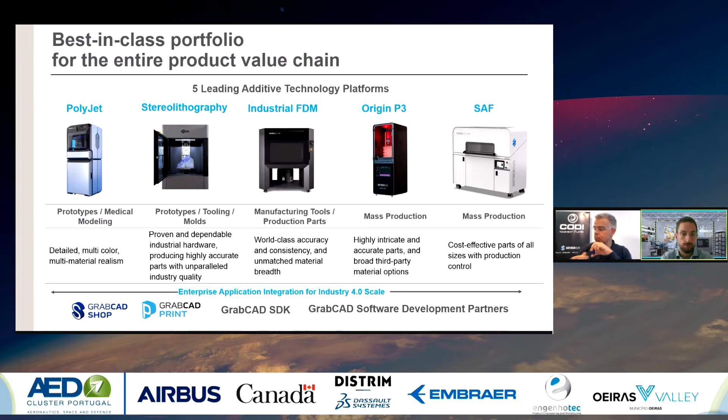What is important, and this is the biggest news of the last years, is software. Through software, we have been able to integrate all our printers in a unique interface, giving the customer the possibility to process their files and have the machine file ready in minutes, easily, and also integrate with the current setup of the manufacturing floor. So it's very important to provide both the hardware and the software, and this is what Stratasys is doing today.

Very quickly on the FDM technology, this is our first technology. It's filament based, and it uses thermoplastic material. We see here on the left a video of how it works briefly, and we see that it's based on the use of model and support material. This is important for what we will see later.

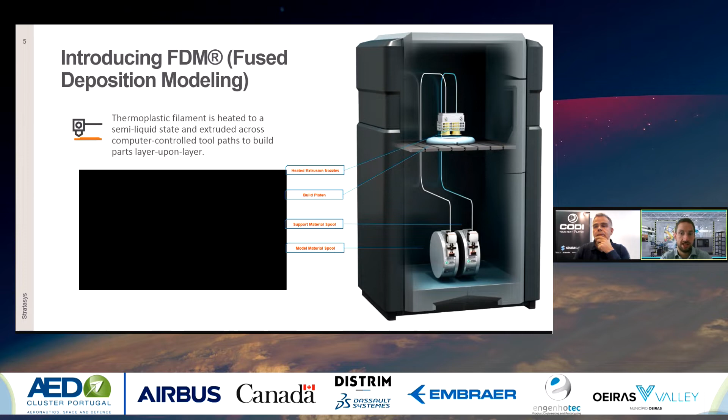Also on the right side, we see a little bit internally into the printer how the material comes. It's in the form of canisters, and this is very important for this technology because it means flexibility and easiness to change between one material and the other. And we will see that it makes possible to access multiple applications through these properties.

The range of printers for FDM today is quite broad. Starting from the left, we have the office printers. We call them in this mode, the F123 series. Given the materials that this printer can use, they are suitable and used for prototypes and tooling. Still for prototype and tooling, we have the F770, which is the biggest or the largest filament-based machine from Stratasys today. This is a 1 meter wide machine, and it was launched last year.

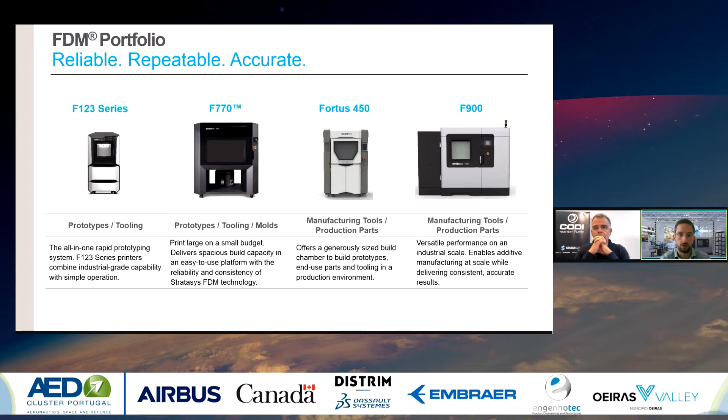It runs ASA and ABS, so it's sold specifically for prototyping and tooling. On the right, we see the two machines that enable production, once again thanks to material - the Fortus 450 and the F900. They are the machines used today by our military customers, by our aerospace customers, automotive, rail, bus, and really advanced industries. We will see now why they are used for this purpose.

Just a couple of words on why an investment on FDM is a good one. First of all, the materials. FDM, by using real thermoplastics, is capable of delivering materials with superior properties. It can be the mechanical properties, the impact resistance, the thermal, the chemical.

Really, every material has its own field of application and enables the customer to fulfill all the requirements. We have seen in the small video and in the small structured design how it works inside. This is an extremely easy to use technology. You don't have powder going around, you don't have resins. It's very quick and easy to change between one material and the other. So really, this is easy to use and unattended technology.

What our customers appreciate a lot is the return on investment. When investing in this machine for the right application, the return on investment is typically between 9 and 18 months. So it's a machine that pays for itself in a very short time.

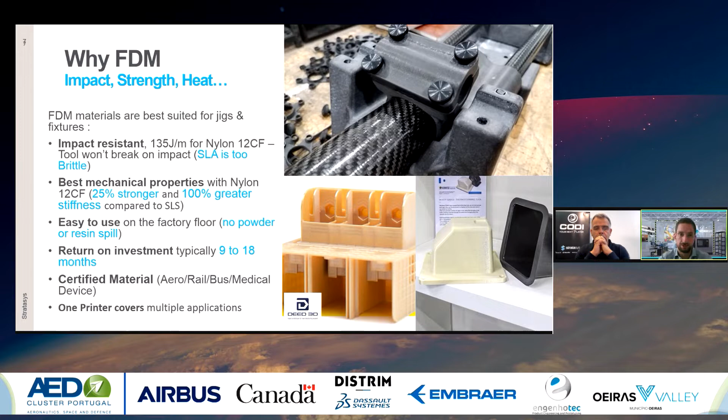Materials, once again, material is the word that I will say the most today. We have certified materials running on these machines. Our materials meet the certification requirements from aerospace, rail, bus, medical, military, biocompatibility—really a lot of different certifications. And here we finally see how we meet all these requirements.

So I divided the materials according to their performance. Going up, we increase the mechanical, thermal, and chemical performance. We start with the standard plastics. We go up with the engineering plastics, where we find the polycarbonate, the nylon, and all the different blends of nylon that we make available to our customer.

And we go up to the high performance materials. Here we find the Ultem family, where we have, for example, the FST rated materials, the materials that are certified for aerospace, for space, for military. We have the nylon 12CF, which is a nylon with 35% carbon fiber, so a very strong material from a mechanical standpoint. We have Antero, which is a PEEK material, so high chemical and high temperature resistance.

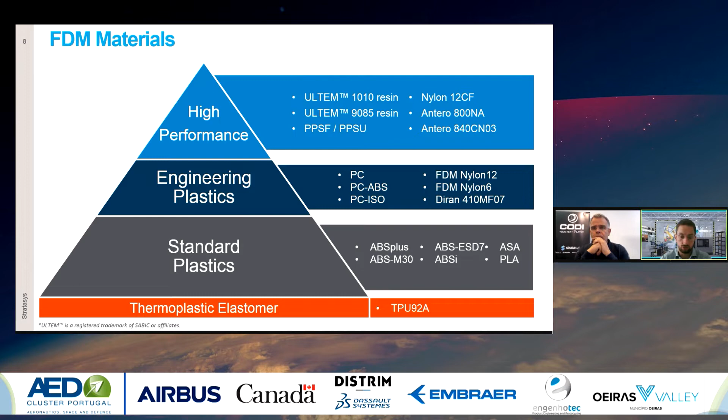At the bottom, you also see that we introduced elastomers. So on the office printer, the F123 family, we have the possibility to print also a TPU. And so we can access all these print applications where we need a flexible material.

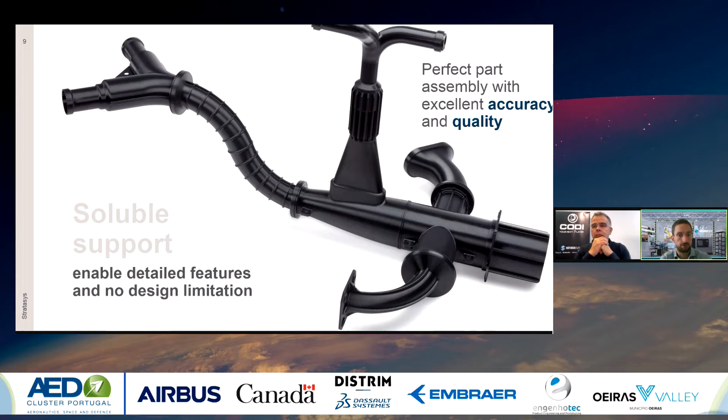I said in the beginning, this technology is based on the support and the model material. We have the possibility to use soluble support. Very briefly, it enables creating even more complicated geometries, because we don't need to manually access the internal part of the component—we can dissolve the support just by putting it in a solution of water and caustic soda. So again, more freedom and more flexibility with FDM.

Last, on material: Stratasys has changed its paradigm on material. We were closed before, and now we've changed to an open paradigm. That means that on the Fortus 450, people will be able to access third-party material, will be able to develop their own material, and tune the parameters of the printer to achieve the best performance of their material.

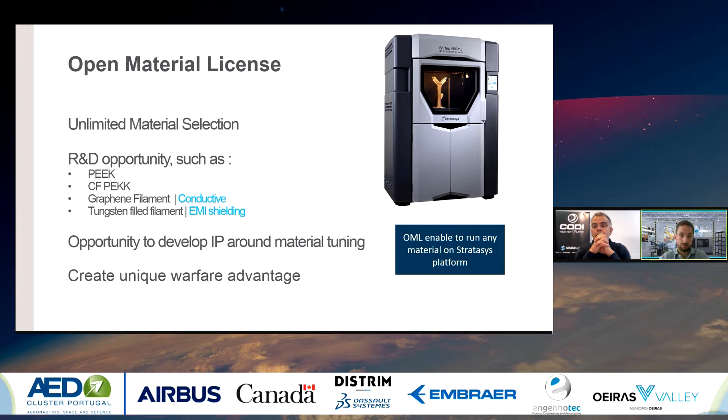This is especially important in the military field, because we know there can be niche materials that aren't developed because they're not for the large market. But with this capability, military customers can develop their own material with their own properties. So this is very important from Stratasys.

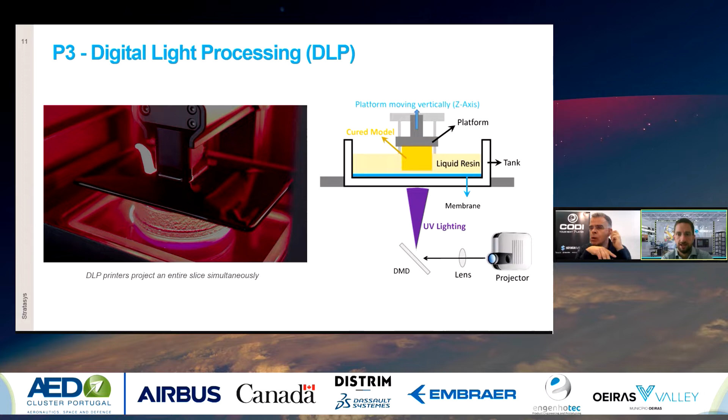Second technology, and this is a kind of new one for Stratasys—it's a digital light processing based technology. We call it P3. And like any DLP technology, it's based on the use of resins and their polymerization, in this case thanks to UV light that is irradiated by a screen onto the shape that we want to create.

Just a couple of highlights on this machine: this is the machine with the lowest part cost on the market based on DLP. It has a build envelope of 192 on the X, 108 on the Y, and 370 millimeters on the Z. On quality, this machine is capable of delivering the best quality within the resin technologies, with a tolerance of plus or minus 50 microns. This is really a game changer in this world of machines, and it has surface quality comparable to injection molding quality parts.

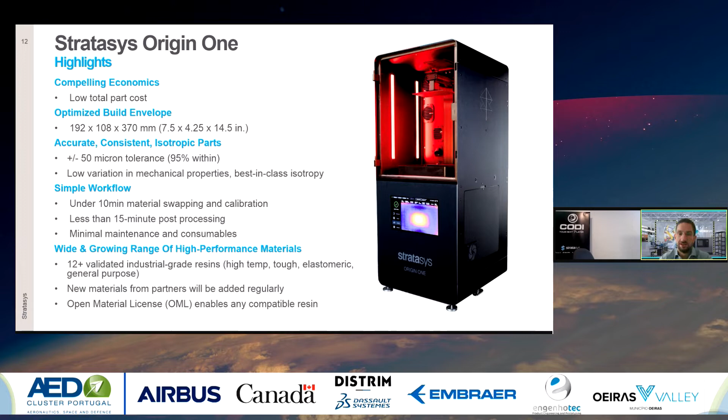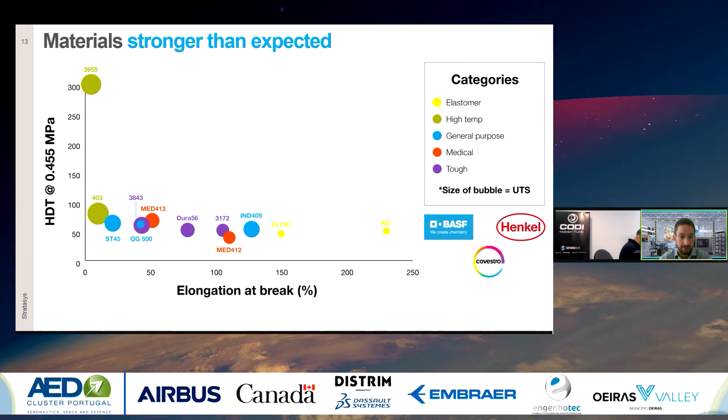What I want to highlight on the left top, we see the 3955. This is a high temperature material, can go around 300 centigrade degrees, and it's FST rated material, so it meets the requirements from the aerospace industry. This is very important because it enables a lot of applications with this new technology.

The third one we will see today in the application is the SAF, our new powder bed based machine. In this case, we work on powder. We have fluid and lamps as a source of energy, and it basically melts the powder to create the part that we want to create.

Just a couple of highlights on this machine. The layer height is 100 microns. We have a size of 315 in X, 208 in Y, and 293 in Z direction. Currently it works with PA11 material, but we announced just last week that we are going to run on this machine also PA12 and polypropylene.

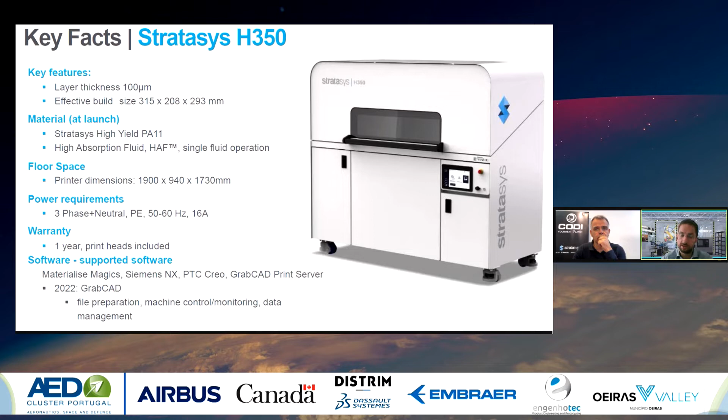So this is also a machine very reliable and that can deliver very low cost per part components. From a material standpoint, it's less wide than the other technologies, but we will see that it's still capable of delivering very important applications for the military industry.

Let's talk now about the application. This is the most important part of the presentation. I introduced a little bit the company, the machines, the materials. Now let's see what we can do for military and for aerospace and defense in general.

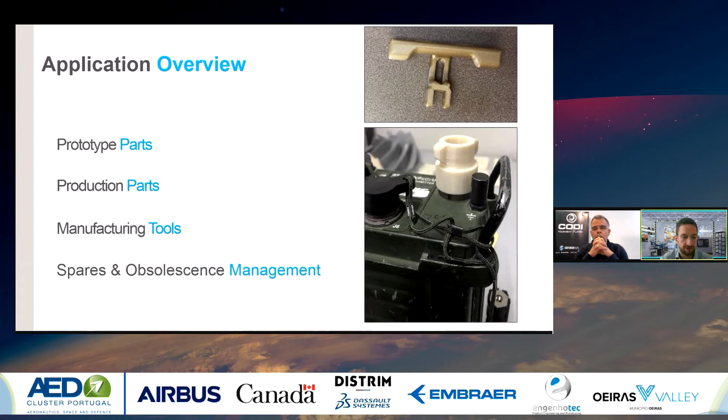Our technology enables, of course, prototyping - that's the history of additive manufacturing. But today we can place ourselves in production parts, manufacturing tools, and also in the management of spare parts and obsolescence. That means we are able to create tools for metal forming, thermoforming, polyurethane, foams, and composite layup tools. Really, our materials and printers enable a wide range of applications.

The first one I would like to show today is metal replacement. We introduced it a couple - well, we had the pandemic in between, so the timeline is a bit stretched - it was 4 years ago actually. We introduced 4 years ago the nylon 12 with carbon fiber.

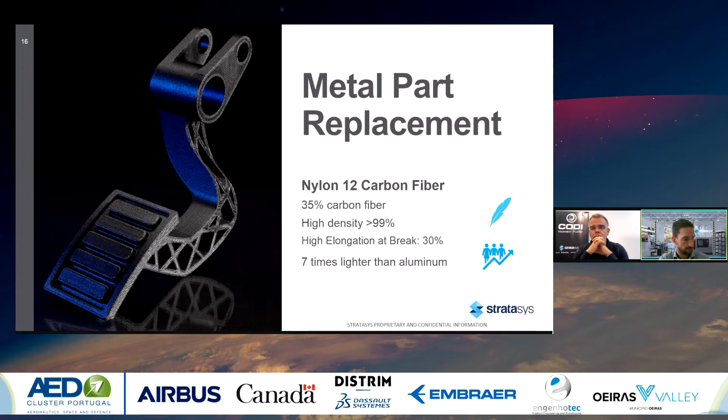We were able to achieve a 61% weight saving, and by that, reduce the cycle time by around 20%. Otherwise, you can keep the same cycle time but use a smaller robot with lower power, meaning a lower investment when you need to buy your robot for your facility. Also on cost saving, besides the time, the cycle time or energy on the robot, you also have direct cost saving on the replacement of the part.

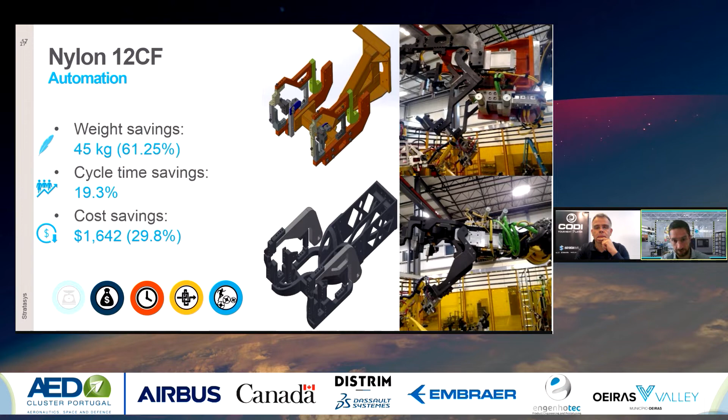The part on the bottom was around 30% cheaper than the previous one made with welded steel. It was also faster, so you achieve all the objectives of additive manufacturing: faster, lighter, and cheaper.

Here, the time advantage is even bigger than the previous example, because we were able to have our parts in hours instead of days or weeks. A couple of properties of the material: it's capable of withstanding over 900 bars of compressive strength, and this leads us directly to the next example.

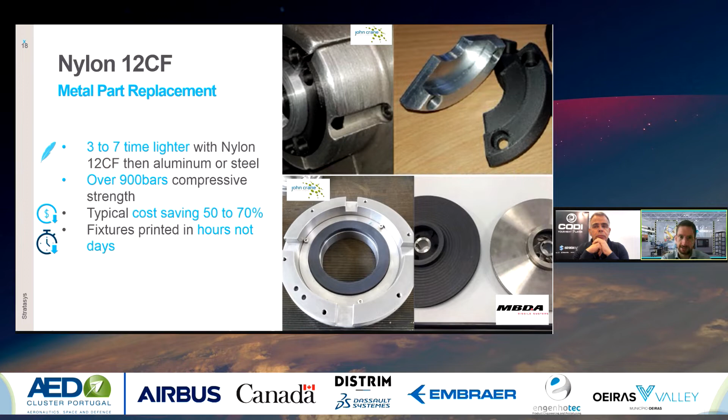Thanks to the compressive strength, we can use our plastic printed part to produce sheet metal. In this case, this is a sheet metal forming mold. Just a couple of words on this tool: the duration. This tool was able to last more than 500 cycles. So we don't have the same duration as a metal tool, but when we have the need to produce something like 500 parts with this metal shape, and this is typical in the military and aerospace sector, we can use our nylon 12 CF part to produce the mold and then do the sheet metal forming.

Thanks to the compressive strength, we can also do several materials, so aluminum, titanium, steel. Of course, depending on the pressure and the material, we need to go to lower thickness, because forming 2 millimeters of steel is different than forming 2 millimeters of aluminum. So again, here we need to be a good engineer and adapt to the requirements, but this is a very valid solution, extremely faster and lower cost in comparison with traditional technology.

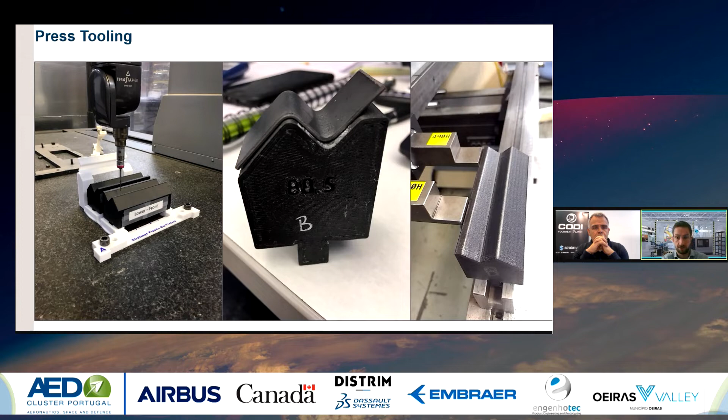Last example, we have a couple more for metal replacement, just to say that it's not only about nylon 12 CF, but we can also use all the other materials we have available on FDM. The example here is Ultem 9085, weight reduction from 68 kilograms to 12 kilograms. Now let's see what the advantage is in this case.

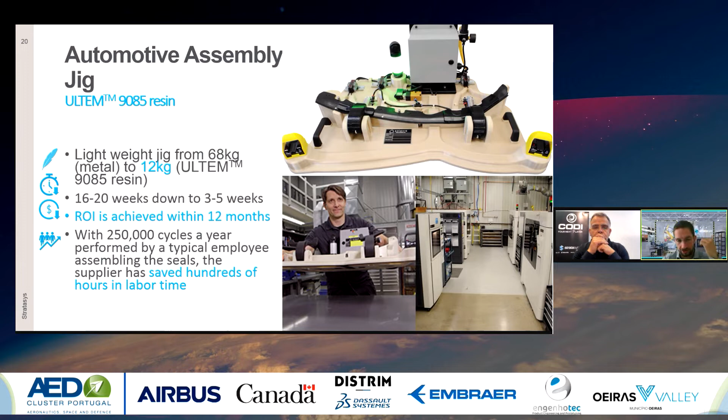On the lower left picture, we see the operator moving this assembly tool with his hands. So you don't need additional equipment to move it. Once again, this is a quicker and cheaper item to get in comparison with traditional technology.

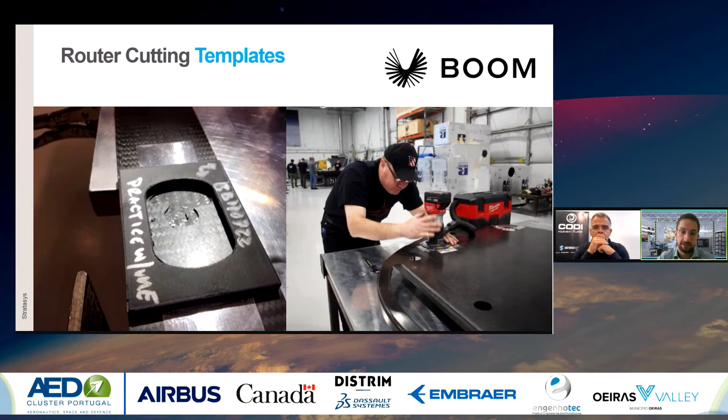Here we see an example from aerospace, Boom Supersonic. On the left, you see a router cutting template, realized with Diran. Diran is a nylon-based material with talc, and it has the lowest coefficient of friction of our materials. This means that if you use a tool made with Diran and by mistake bump into your part, this will not create any scratch. This is a very good property for a tool, and this is why Boom is using our Diran material and our printers to produce these kinds of templates in their manufacturing chain.

This is the last one from the metal replacement section. I just wanted to underline the capability of reaching high temperature for our materials. ULTEM 1010 can go up to 213 degrees. You can think about a lot of applications. Just one that I brought today is spraying for thermal procedure coating.

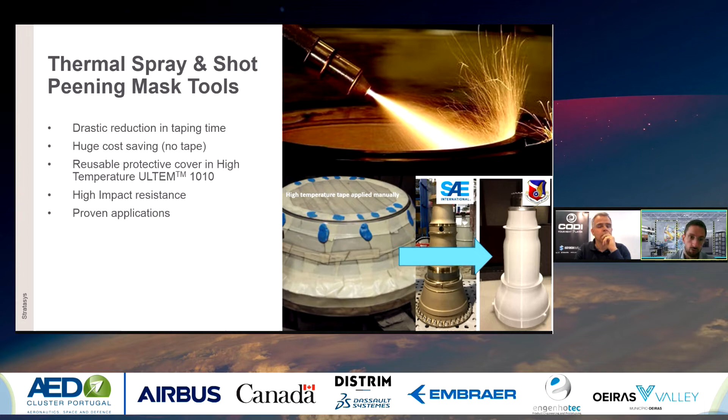You see on the top image this procedure applied to an aeronautic engine. When you need to do maintenance on an engine and need covers for the areas that don't need to be coated, you can produce the cover with ULTEM 1010. In this case, you save the time that was before needed to do the covers with manual taping, as referenced in the lower left picture. So you save the time and the cost associated. An additional advantage is that this is a reusable mask, so you don't need to waste it after the first use. Very important in maintenance, repair, and overhaul.

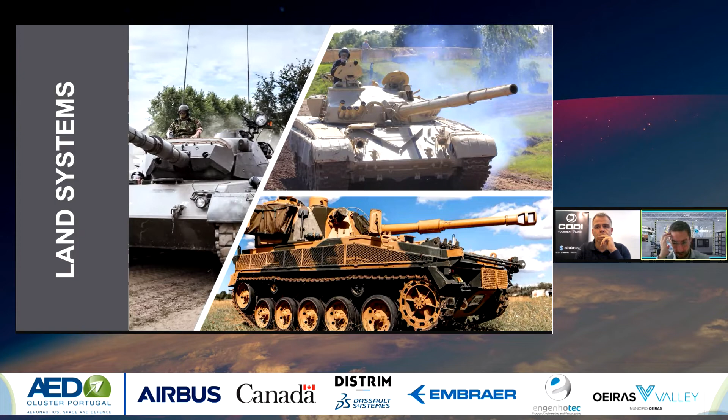Now we go directly to the military. I divided it into three main families: land, naval, and air. We start from land, and we have seen a wide use of our system in defense and land applications. All the pictures you see here are slightly modified from the real part, because we cannot disclose the original one.

These have been used on 6 tanks as of today, for applications like a fire extinguisher bracket or a storage compartment divider. In this case we used ULTEM 9085 initially because of the beginning requirements. The requirements were relaxed a bit, so this component is now produced with nylon 12 CF, and it's actually 2,700 pounds cheaper than the original. These examples are coming from the UK, so the data are in pounds, but we can easily make the parallel with euros.

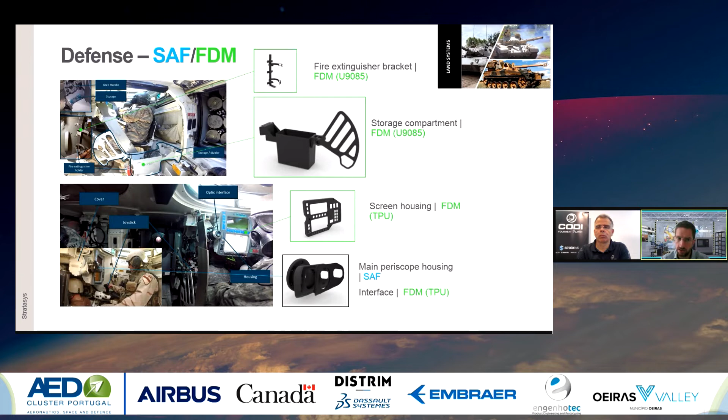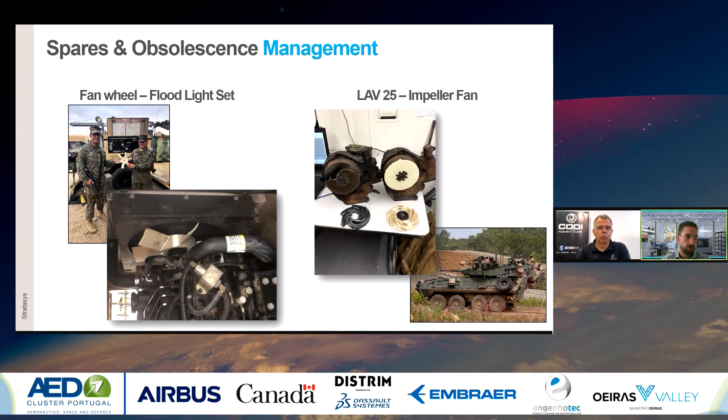Going forward, we see the specific quantities for these examples. Sorry, I moved the bar for a second, I had the visual obstructed.

So we see the fan from the previous slide here in detail. This is a heat resistant part, so it can go up above 150 degrees, really fulfilling the requirements from the military field. Cost reduction is between 40 and 90% for the two examples we see in this slide. And once again, this is a metal part replacement - the original one was in metal, and the replacement was done with FDM on the field, with lower cost and lower time.

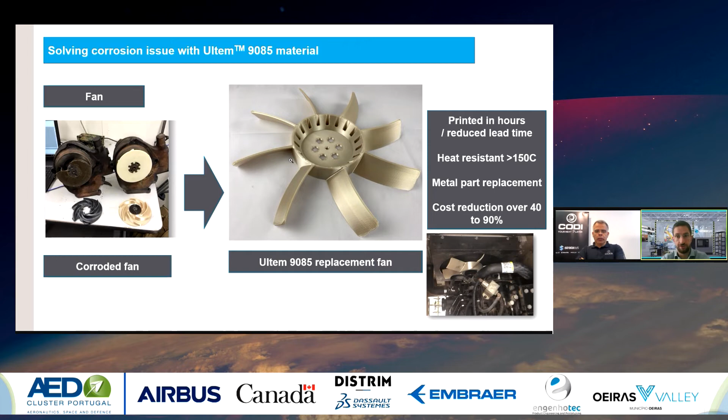Additional example: we see here the handle of this satellite. The handle is in the lowest part, and on top you see the satellite communication system. This handle was breaking frequently, so it was necessary to replace it often. The OEM part was costing $45, and our customer was able to produce it with ULTEM 9085 for a cost of only about $13 - a huge cost reduction. Additionally, the part is breaking less now, and when we do have this unlikely event of breakage, we can substitute it very quickly, producing it directly on the field.

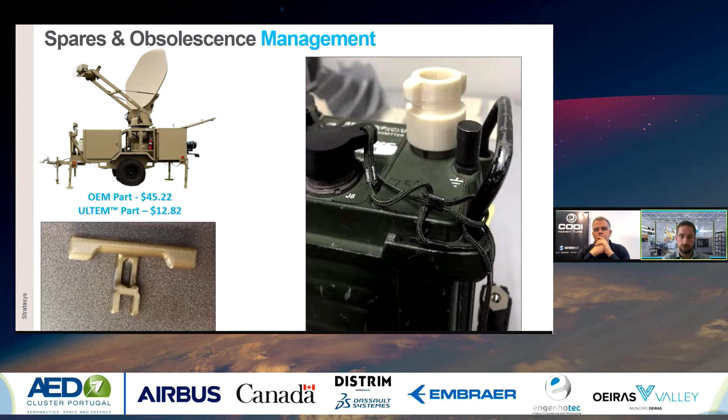On the right we have a couple more examples. The black one is the cover, realized with ASA material, and the golden one is in ULTEM 9085. So again, depending on the requirements of the part, we use different materials to meet those requirements.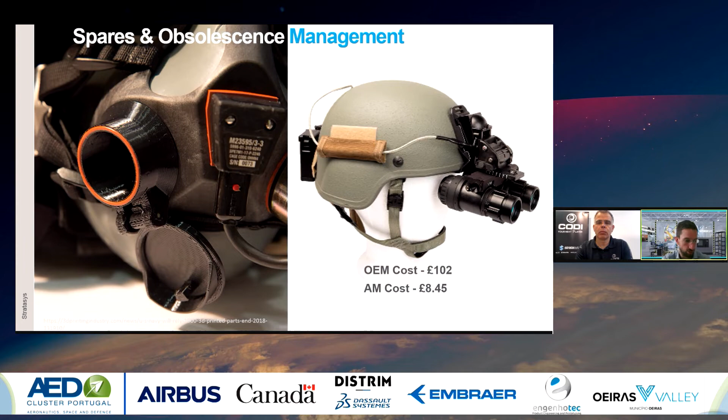Going forward and very quickly over naval, we have many more cases coming also for the naval side of defense. For example, radomes for antennas - the cover part of the antenna can be produced with our component. We also have very good behavior from an electromagnetic standpoint, which can be taken into account when using a polymer instead of a metal.

Then we have, for example, air vents, and if we move into the engine room, we have the engine fan, the fan housing, and the possibility to create, for example, the valve handle in a more ergonomic shape than the original.

Need to underline here that the chemical compatibility of FDM material and of thermoplastic in general make them really good materials in this kind of environment. Remember, you are using salty water, you are in a moisty environment, and so rust and corrosion are problems you avoid by using FDM.

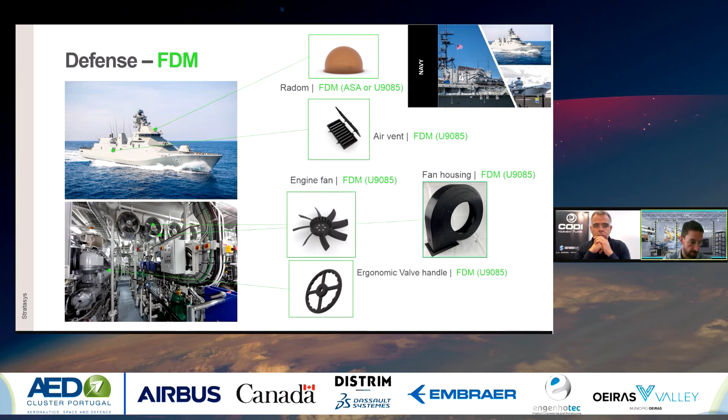Going inside the ship, we have seen something outside, let's see something inside.

We see other examples. Moving from left to right, we see light housing, the possibility to create shelves, and the possibility to substitute the plugs. They break quite often in ships and are quite complicated assemblies. When you break one and replace it using the one provided by the OEM, you will need to replace the entire assembly.

With additive manufacturing, you can produce just the part that breaks. So you save, once again, time and money, and you have materials capable of withstanding the requirements.

For example, we have ESD capable material. So when you need ESD, more conductive material than the insulative traditional one, you can use ABS ESD or PEKK in the ESD version. So once again, really a lot of flexibility from our system.

On the left, you see the possibility to go into a less noble environment, but still needed on a ship: a toilet cover. This is an example from the US Air Force, actually, and we will see it explained better later. But this is being done also in naval. People print replacement parts for the toilet with additive manufacturing.

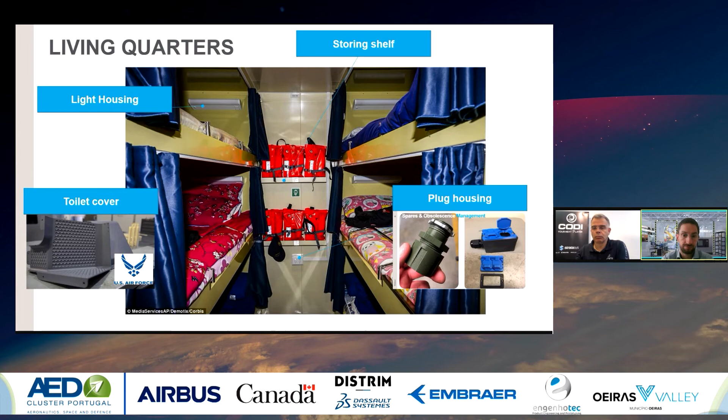The next example is coming from a couple of slides before: the valve handle. Here, once again, on the left we have the picture of the metal part, the original one, and on the right, the replacement. Clearly the left one broke and it was replaced with an Ultem 9085 part. Why Ultem 9085? Because there was the requirement to be FST rated: flame retardant, smoke, and toxicity rated.

For this part, we were able to reduce the cost by more than 50%. It was also printed in hours, and very importantly, the ship was blocked with this valve broken, so it was a real big economic damage. Reducing the time from days to hours was a big advantage for our customer.

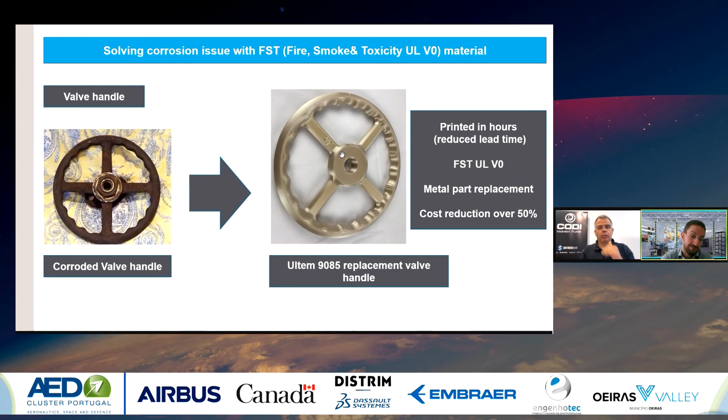Just one additional thing: in this case, the material used was Ultem, but if you don't have the requirement for FST rated material, you can look into our wide offer of materials and use another one to produce the same part. Going to the last chapter, this is the air.

So we go to the origin of aerospace and defense, coming back to aerospace, with an example of maintenance, once again, of a military fleet. The part you see here is a replacement part for an out-of-production aircraft, which is the B-2 bomber. We see the image on the lower left.

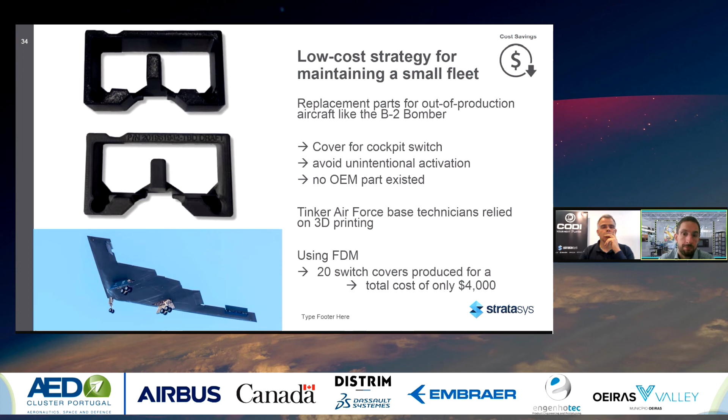The component is a cover for a cockpit switch, designed to avoid unintentional activation. The switch below is covered, so in this case you avoid hitting it by mistake. This part didn't exist from the OEM, so it's an improvement the US Air Force thought of. They trusted 3D printing and were able to print, as you see in the numbers on the lower right of this slide, using FDM. They printed 20 covers for their fleet of B-2 bombers, and the total cost was only $4,000, extremely cheap to maintain the whole fleet with this component.

Here's the other component I anticipated before: a toilet cover done with Ultem 9085. Here we don't have the natural appearance of Ultem 9085, and this is another thing I like to underline: we can always do post-processing on our FDM printed parts. In this case, it was a painted part, and the paint applied was, of course, also FST rated. We printed the part, post-processed it, and then it was possible to put it on the aircraft.

Let's move to the top of this slide: cost reduction. Cost reduction is dramatic for this example.

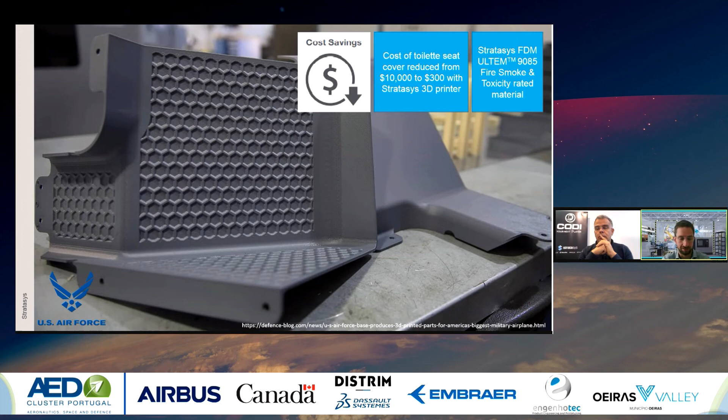By ordering the toilet cover, the customer needed to pay $10,000. With the Stratasys 3D printer and materials, they were able to replace it for $300 — a dramatic decrease. In this case, Ultem 9085 was used because it's a flying part that needs to be flame, smoke, and toxicity rated. This material is FST rated, not only for military but also for civil aviation, so we can do end-use parts with Ultem 9085 and our printers.

Let's go quickly through the last couple of examples. Here we switch technology. As I said in the beginning, we have Origin. We have 3955 from Henkel. This is a UL 94 V0 rated material, and it withstands the FST requirements from aviation regulation.

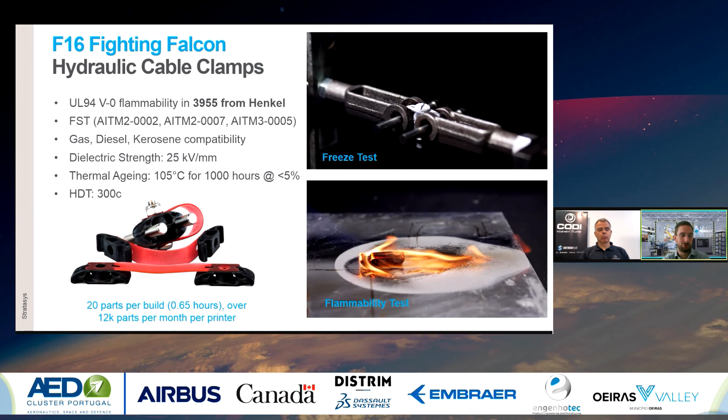Here's an example: a hydraulic cable clamp used on the F-16 Fighting Falcon jet. This part was very cheap and very quick to produce — more than 12,000 parts per month per printer, shown on the lower left. This is the potential of this technology in the future. On the right, you see the demonstration that this is an FST rated material, and the flammability tests were successfully passed.

Moving into drones — military doesn't mean only military aircraft, it's also about drones. With our technology, drones are one of the biggest fields of application. You see examples on the lower left: a spar, and on the right, an antenna bracket. For the antenna bracket specifically, we reduced the price from $378, the OEM price, to only $16 by printing it with additive manufacturing. It's a very small part with a low amount of material — $16 with additive versus $378 with the original OEM replacement.

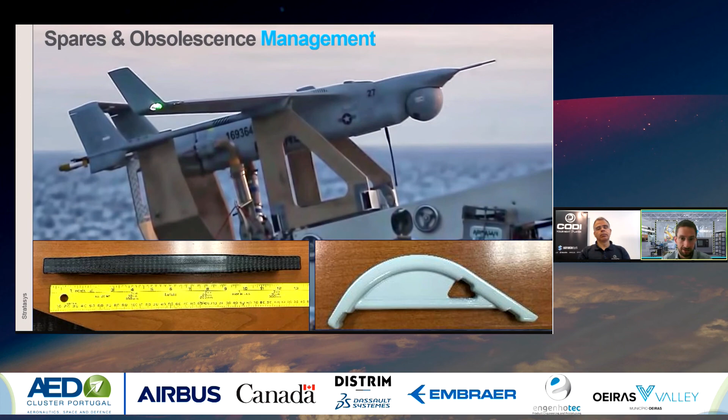So you see on drones we also have the advantage. Additionally, on drones we have fewer requirements from a regulation standpoint, so we can use cheaper materials — we don't need Ultem, we can use ABS if needed. So really the flexibility is even greater. We don't limit ourselves to flying parts; we can also produce ground equipment.

In this case, the customer Marshall Aerospace needed to create a component to direct air to the avionics. During maintenance on the ground, they need to provide cool air to avionics, and they didn't have the right tool, so they were able to print this ground equipment with our printer. Very importantly, they reduced the weight of the part by 63%. This part is handled by an operator, so reducing the weight makes the operation easier, reduces errors, and improves everything from an operational standpoint.

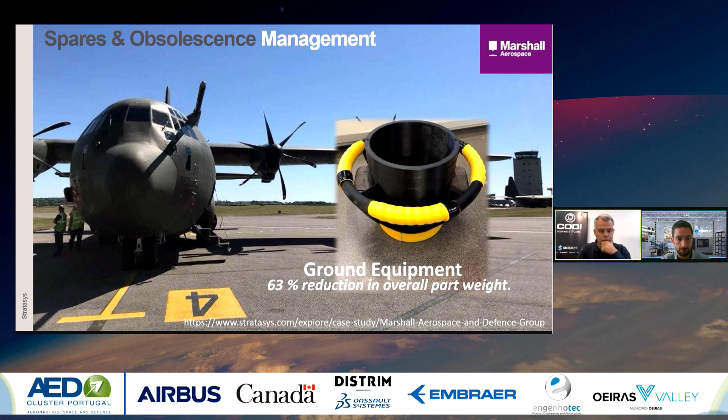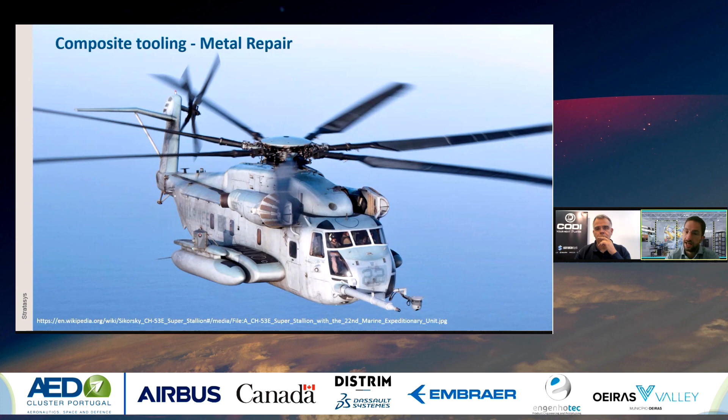Now for the last example: composite tooling. Remember, we have high temperature resistant material. This example is from the Super Stallion helicopter, where the case was a crack on a blade. There's a pressure sensor inside the blade, and when the blade breaks, the pressure drops and the sensor sends an alarm. In this case, it's normally necessary to replace the blade.

Our customer, with our solution, was able to put in place a different solution — they did just a repair of the blade instead of buying a whole new one, using our printed mold to create the preform for the composite prepreg. They printed the preform with Ultem 9085, and were able to repair the blade instead of buying the entire blade. Buying a new blade would have cost $210,000 with a 160-day turnaround time.

So this would be the standard way of repairing or substituting the blade. By using our components for composite tooling, they were able to spend only $15,000 and repair the blade in 21 days — a saving of $195,000 per blade, with turnaround time reduced by 140 days. Extremely quick, extremely cheap — really a game-changing solution for them.

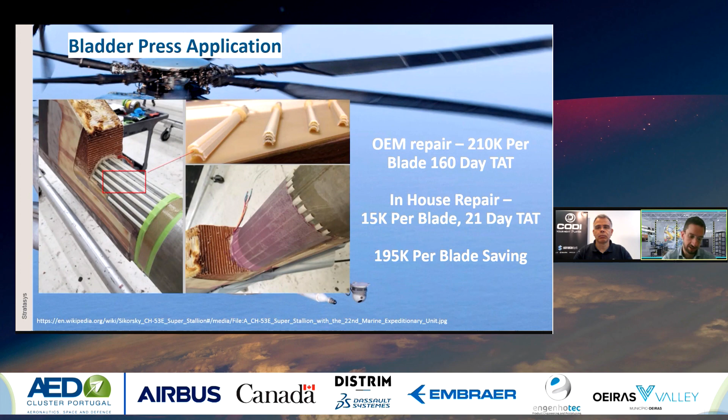This was the last example. Thanks from my side for listening, and now open for Q&A.